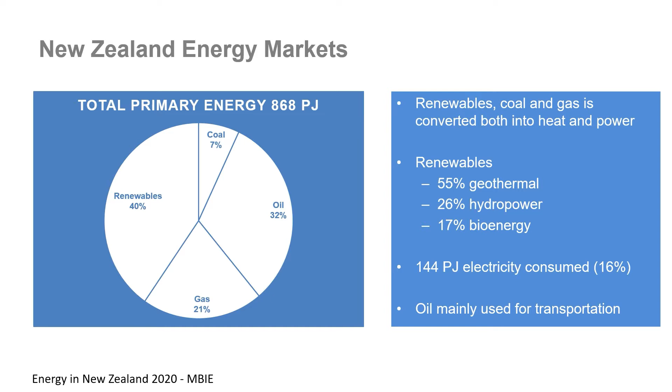There are a range of other strategic drivers that will encourage the use of biofuels and bioenergy in New Zealand. New Zealand is at the end of a long and quite complicated supply chain, so energy risks need to be considered for our long-term future. That becomes even more important with the imminent closure of Marsden Point.

Just to put this into perspective, New Zealand pays $11.2 billion for the crude oil and products we import.

If we look at carbon footprint, we know there are markets around the world accepting our products that are becoming more and more concerned about carbon footprint or embedded carbon of those export products. For instance, the humble kiwi fruit - 60% of the carbon dioxide emissions associated with its export to market is due to the combustion of fuels in its transportation. Because New Zealand is a long way from some of these markets, we're more exposed than most.

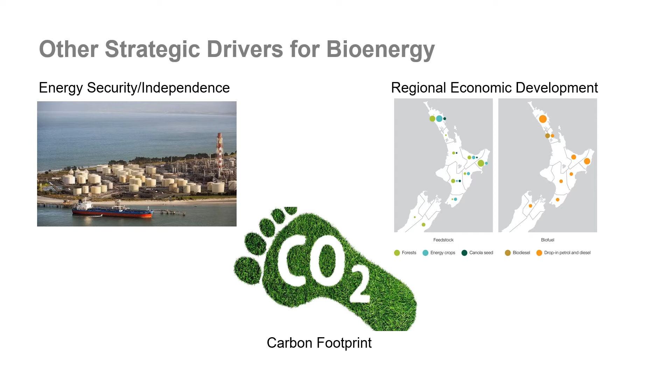So what is the emerging legislation around biofuels here in New Zealand? It has to be said we are slightly behind the curve. Our legislation and our interest in biofuels has only really started emerging in the last year or so, predominantly through the Climate Change Commission's advice to government.

In that advice, they said government should develop a national low emission freight strategy. It should have plans around not allowing new coal boilers to be installed, and plans around phasing out fossil fuels, particularly coal, from existing boilers around the country. We should also be supporting innovation to decarbonise these hard-to-decarbonise sectors.

In terms of state leadership, the government has already spent $300 million decarbonising state properties and functions, and decarbonising certain industrial sectors, starting to make inroads into the emissions the government is responsible for. But now it's also starting to draft legislation around removing coal from process heat applications and looking at a biofuels mandate for New Zealand.

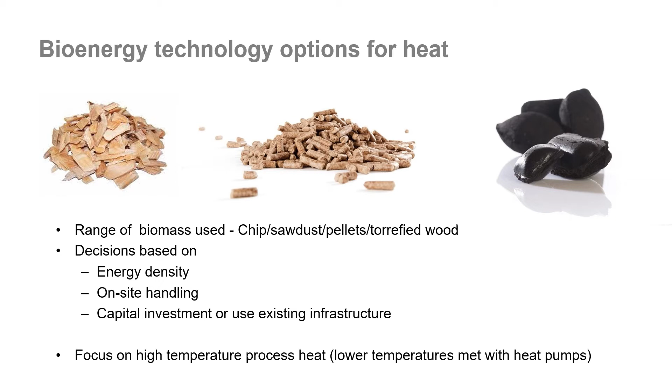In 2018, Scion produced a roadmap for liquid biofuels production in New Zealand, and this was really trying to paint a picture of what a large-scale liquid biofuels industry would look like in New Zealand. We worked with a range of stakeholders, 23 stakeholders in fact, across a range of industry and government sectors.

And the key conclusions that came out of that were we should be focusing on drop-in liquid biofuels. So these are fuels that are chemically and physically identical to the fuels we currently use, but they are made from biomass. And we should focus those drop-in fuels into specific sectors, so the aviation and the marine sector in particular.

We also recognise that we do not want to replace feedstocks. Sorry, let me repeat that. We also know that we do not want to replace food production with bioenergy production. That would be a non-starter for New Zealand. And therefore, we will not be looking to grow feedstocks on arable land.

And that really then points us in the direction of plantation forestry feedstocks being the best long-term solution for large-scale biofuel play here in New Zealand. And there is also the opportunity to start thinking about dedicated bioenergy options, dedicated bioenergy feedstocks grown here in New Zealand.

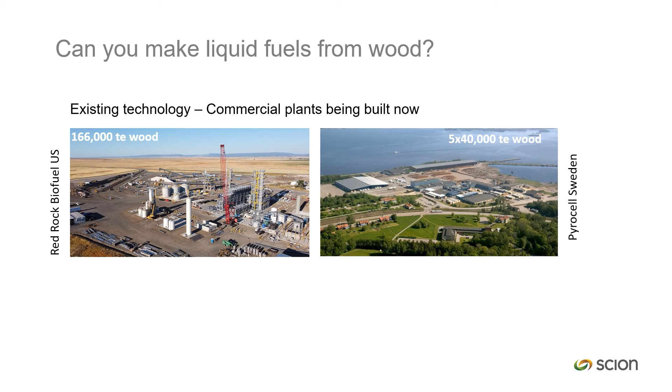The picture on the right shows a plant in Sweden in which they're converting 40,000 tons of wood through to a liquid intermediate that is then going to be processed at an oil refinery. And they're taking an approach called the hub and spoke approach, where they're going to build 5 of these plants around a single refinery, so all 5 plants will be providing feedstock into this refinery.

So last year, carbon prices in New Zealand ranged from 20 to 35 dollars per tonne. At the end of September this year, they were up at $65 per tonne. The Climate Change Commission says by 2035, carbon prices could need to rise to $140 a tonne. And by 2050, when we're due to meet our net zero target, carbon prices could be anything from $150 to $250 a tonne. And that depends on a whole range of factors, such as how quickly technology is developed and implemented.

If we then look at bioenergy, and we look at the current break-even price for coal, well, we see that is at about $80 a tonne. So we're very close to the current carbon price here. And we know that there are companies already starting to convert to solid fuels. So for instance, Fonterra converted the Te Awamutu plant to wood pellets. So this is starting to happen now. And forward-thinking companies are already starting to convert, despite the carbon price not being quite where it needs to be.

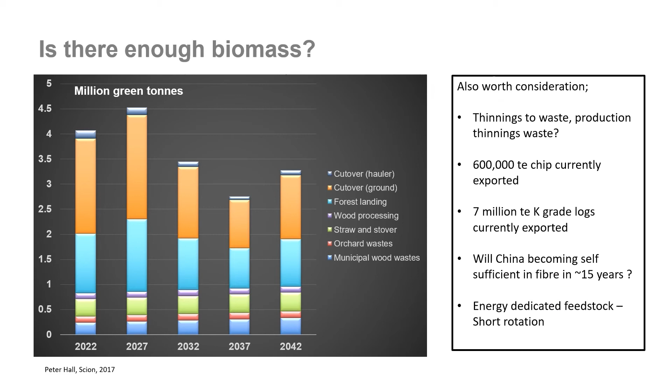So is there enough biomass for bioenergy? If we just look at the current residues, i.e. the 4 million tonnes of forest waste, that could be converted to 700 million litres of liquid fuel. That would be about 30% of our aviation and marine requirements. If we look at the total fuel used in New Zealand, that 700 million litres would equate to about 8.5% of the total fuels we use, and we use 8.5 billion litres in total.

Alternatively, that 4 million tonnes of forest waste could be used to replace the 2 million tonnes of coal used around New Zealand. So I think what I'm trying to say is we have sufficient biomass to make a really good start at decarbonising both the transport and heat sectors. But if bioenergy really takes off and fibre prices start to rise, there's more low-grade fibre that we currently export that becomes fair game for bioenergy. And then don't forget the possibility of energy-specific fibre plantations.

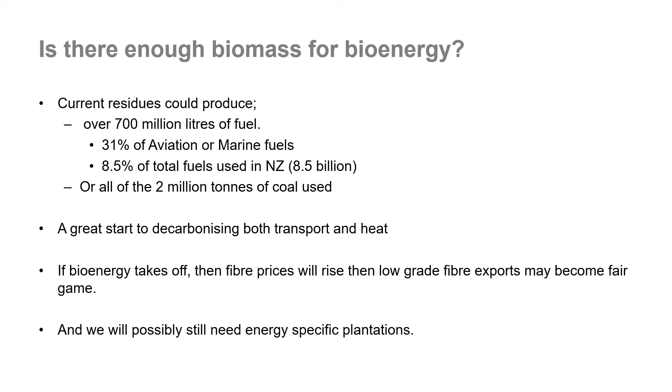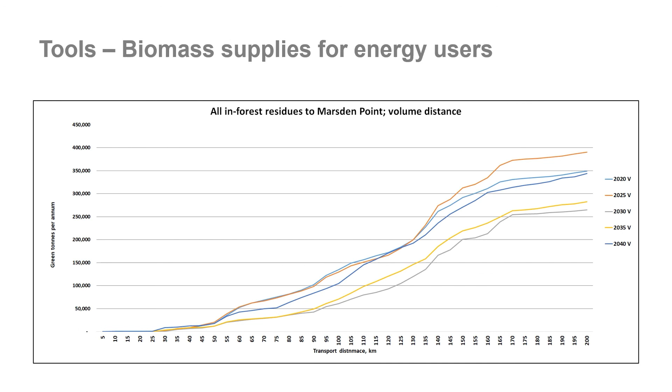In terms of what tools are available, there are tools for energy users. Scion has produced some tools that allow energy users to understand the availability of biomass around a given plant, a given point on the map. So we can tell them how much biomass is available to a specific site. And because of good knowledge of roading networks around New Zealand, we can also estimate the cost of getting that material to a given site.

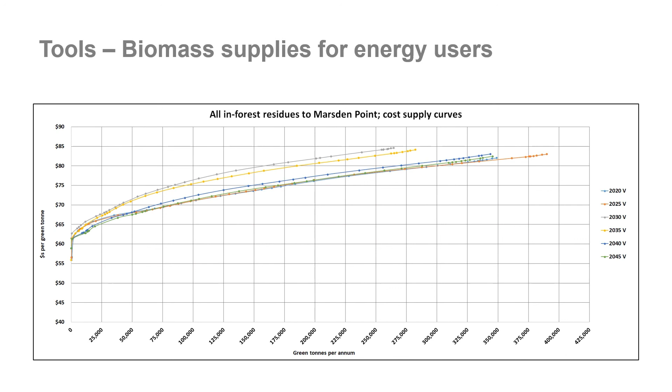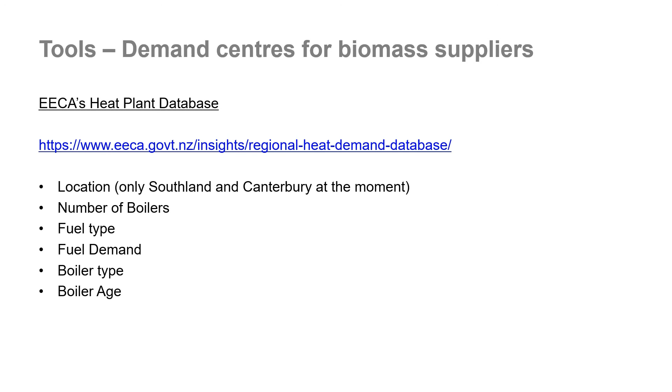At a regional level you can look and see the number of boilers in the region, what fuel type they're currently using, what the total fuel demand is — so how much coal, gas, or even biomass is currently being used in those boilers — what type of boiler they've got, and what the age of the boiler is. From that, a biomass supplier can start thinking about its business development strategy.

So I'd just like to conclude with a few statements. I believe bioenergy is starting to become of huge interest in New Zealand. We're having lots of conversations, both from a supply and a demand perspective. But we are behind the curve. Legislation is starting to be developed, but there's a lot we can learn from what's happening overseas in terms of technology and importing that technology, and in terms of policy and importing the policies that really did work.

I think I've hopefully shown you that there is enough biomass to get going with decarbonising both the heat sector and the transportation sector, and we have tools available to make an assessment around the availability and cost of biomass. I think we also shouldn't forget that we have some land available across New Zealand for new opportunities, particularly focused around more rapid energy-specific feedstock production. So thank you.